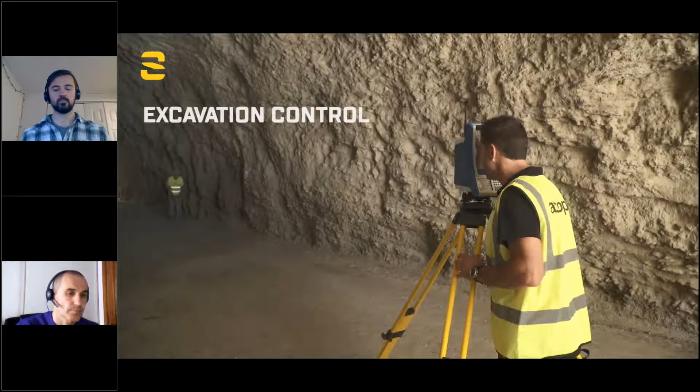One of the scenes in that video was very telling to me, because I worked quite closely with Aplitop and our development engineers out of Germany on what's called the software development kit that allows their software to talk to my robot. And they are actually doing the surface scan feature, which is part of that video. They're doing that better than I do it myself. They found a technique within that SDK that allows them to do surface scan at probably 2 or 3 times the speed that my Survey Pro does that at.

It's not an important feature of Survey Pro, but it is very important to the Aplitop solution, and they've maximized the efficiency there.

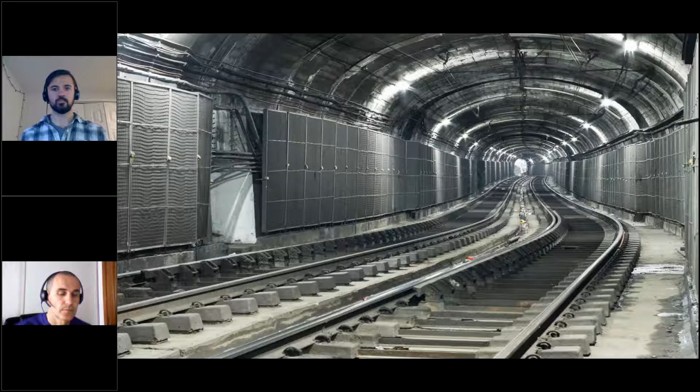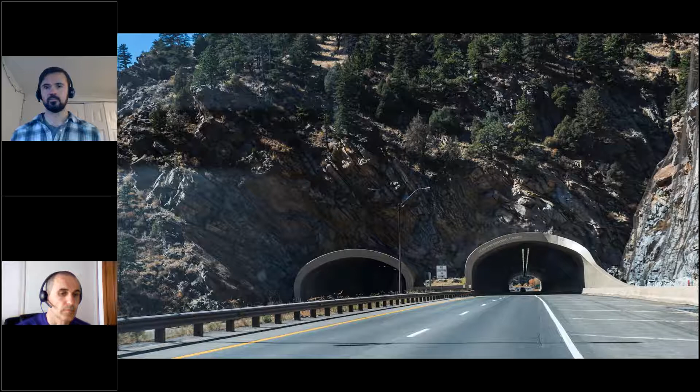So tunnels look different, but they're all the same. They come in a lot of different shapes and sizes, but they're holes - tubes in the ground. They are alignment and template based, station and offset. They use a few words we're not used to using: overbreak, underbreak. But for the most part, the syntax is the same, and the workflow is the same as a land surveyor is doing today. It's just in a very specialized environment that's tubular and linear.

Tunnels are everywhere, and they're constantly being built and maintained, and it's a large business opportunity for land surveyors. There's even books written about tunnels, right? So tunnels are everywhere. They're part of our life.

So what are some of the challenges and the solutions waiting for tunnelers? I'll let Riley speak to this. Riley? Is on mute, Riley, of course. There, all right, sorry about that, thank you everyone.

So how I look at the challenges is there are really 3 categories when we're talking about tunnel surveying. The first one, one of the bigger ones, is construction downtime. Anyone who's worked in a tunnel or on the survey or construction side knows it's a pretty go-go process. There's not a lot of time to lose, because each minute, each hour that the equipment's not working, whether it's the TBM or the road header, whatever it might be, that's a lot of money being wasted. So it's really important for the survey crews to keep up with that equipment and be productive while they're in the field. That's why productivity with any technology, whether it's the total station or the field software, is very important.

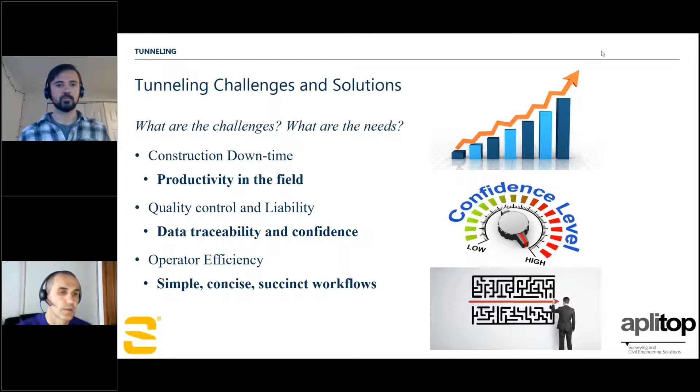Thank you very much, Riley. Well said, well spoken, thank you. Somehow my down arrow is not working on my computer, I don't know why.

So what does it take to build a tunnel? It takes an office component and a field component. In the office, we're designing the tunnel, or quality checking or reporting about it afterwards - so there's both a pre-field and a post-field component. If we look on the right-hand side, the robotic Focus 35 robotic total station is integral to this solution. As far as the data collection platform, we're recommending either the ST10 or the Ranger 7, with a preference for the ST10 - it just seems to work better. There's not a lot of typing in tunnel surveys, so you don't really need the keyboard that the Ranger 7 offers. Notice also that there is an AutoCAD component in the design portion of this. Soon that will be a standalone portion not requiring AutoCAD, but today that is one of the requirements.

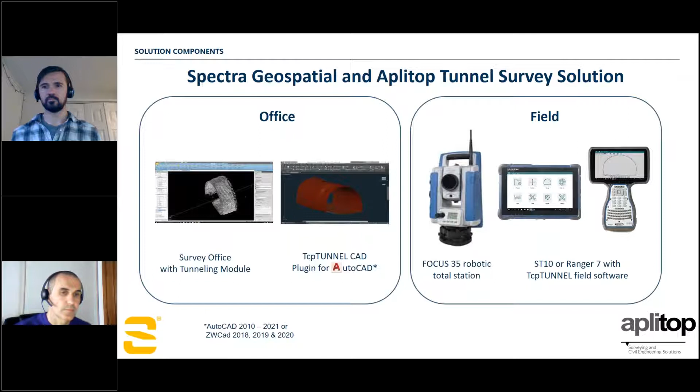So the pre-field part is where we create and design our alignments. It's not really a point-based workflow, it's an alignment and template-based workflow. Basically we're trying to do our stakeout for the blast and drilling so that we can shape our tunnel. Once we've done the drill and blasting, we need to get the as-built, and that's where automated data collection comes in, where we can do surface scans and see how close we are to that design, and what our overbreak and underbreak quantities are.

We can do the quality control checking right here once we've built the tunnel or laid it out and done the blasting, so we can know how close we are to that design. That's the end game: how close can we get to the design, and what are the deltas between what we built and what we designed.

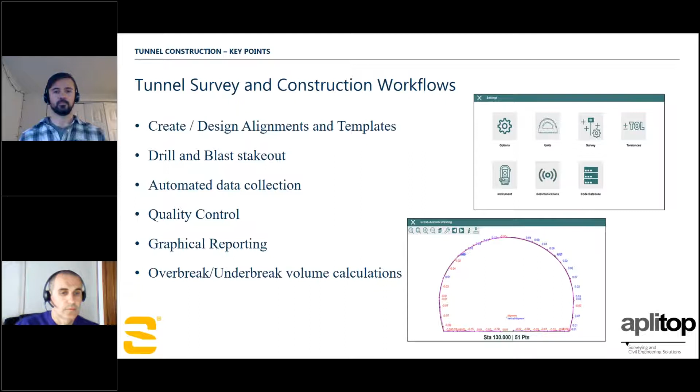Looking at it in a more broken out way, we start in the office, we have projects - that's the actual tunnel project, or tunnels. Many of these are multiple tunnel definitions. Then we create and design the templates and the cross sections, and assign the cross sections along the alignment. Then we take the total station out there and stake it out, laying out those points.

We put in the points where they're going to do the drill and blasting. Once they've done that, we do the surface scan to make sure it's done right, and take all that information back into the office where we can do our reporting. That's the main thing - as Riley said earlier, the accountability and liability is a big part of tunneling that may not be so important in land surveying on the surface, but becomes very important when you start going underground.

Tunnels can be defined in a few different ways - these are two examples where it usually has a radius point that defines how the roof and sides are going to be defined, whether it's a full radius as you see on the left, or whether it has a left and right sidewall that are vertical before you go into the radius or arc component. Sometimes the ground is flat, sometimes it has a side slope, just like we do in roads. You can see we have super elevation possibilities, straight from our roading catalog that we're familiar with today. Nothing there is surprising, except maybe the way the files are named.

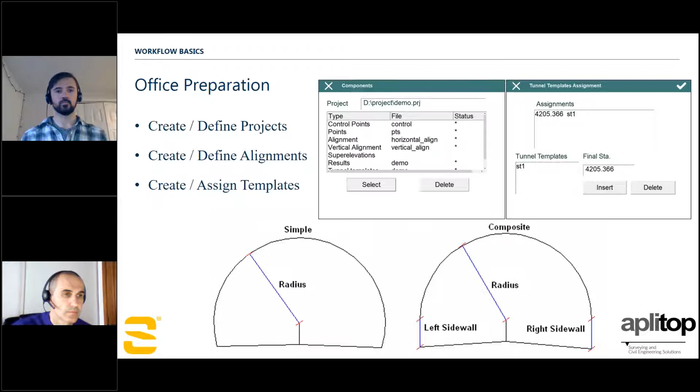Once we've done that design and assigned the cross sections to our alignments, it's time to go out to the field and do our layout, our survey. We do the cross sections to find where the bolts go, where the surface points are, the front cross sections. We go out there, and as you can see in the screen captures provided, these are nice big icons that are fully clickable with gloves on.

As Hugo indicated, this is a very simple program to interface with, and it's not hard to negotiate. If you don't find it on the first button click, you're going to find it on the second button click - it's that close to the surface with all of the routines and features of the program.

I talked with Hugo prior to this presentation, and he's wide open to anybody on this call that wants to test drive the software. Work with Hugo and he'll let you have a copy, probably a timed copy, where you can interface with the software. If you have a Focus 35, even better, but without the Focus 35, you can still get the look and feel of the software quite well.

So we've done our field work, and we come back to the office. These are just a few examples of the office deliverables where we can do 3D modeling, volume calculations, visualization, and generate reports. We can compare the as-built to the design and get our calculations about the volumes involved in overbreaks or underbreaks.

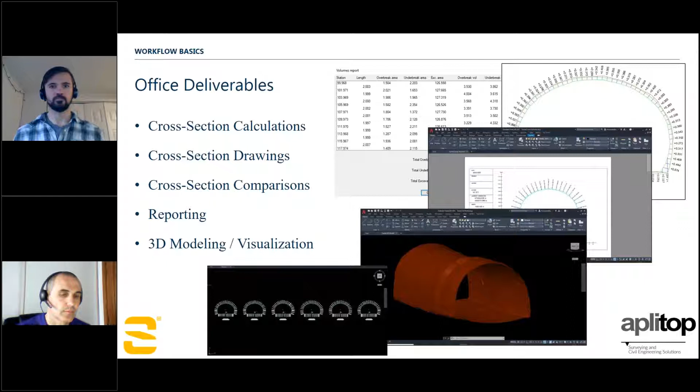So this is just an example of some of the deliverables. There are obviously a lot more that can be provided, but in the context of a webinar we're not going to go through the weeds on that. With that, I'd like to turn the presentation over to David Vargas, who's going to run through a practical presentation of the software and show a real demonstration of the workflow involved in TcpTunnel CAD.

Thank you. I'm going to do the presentation of TcpTunnel and TcpTunnel CAD, following the workflow we've seen in the previous slides. I'll start by creating the project in TcpTunnel CAD, then do a survey with TcpTunnel, and then go back to TcpTunnel CAD to draw the cross sections and create the 3D model of the tunnel.

The first thing we have to do is create a folder and copy inside the files of the project. In this case, we have a LandXML file with the horizontal and vertical alignment definition, and also a DWG file with the tunnel template.

So we go to AutoCAD, and this is the TcpTunnel menu. You have the option to create the project, to create the tunnel templates, to do the cross-section calculations, to do the reports, and also different options such as 3D model, compare cross-section, etc.

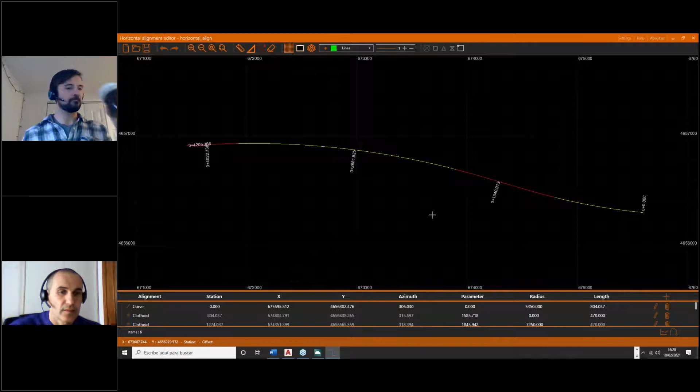Then we are going to import the horizontal and vertical alignment. We go to the horizontal alignment editor and select our LandXML file. We enter the name for this alignment, and this is the horizontal alignment of the project. Then we do the same for vertical alignment - open the vertical alignment editor, go to the same folder and select the same file, and here we have the vertical alignment of the project.

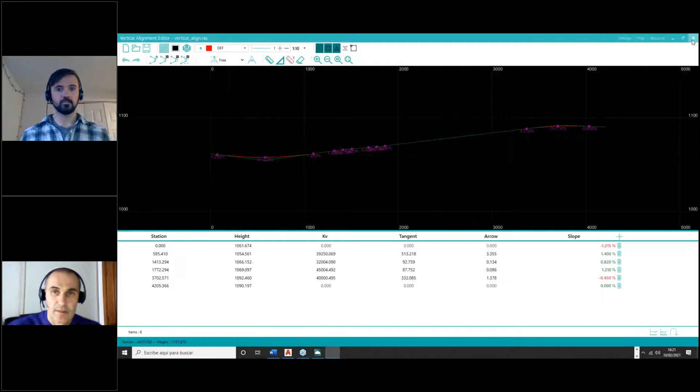Then we have the vertical and horizontal alignment. We select the tunnel template file, and also the control point to do the resection in TcpTunnel in the field. Then we press OK, and we have created the project.

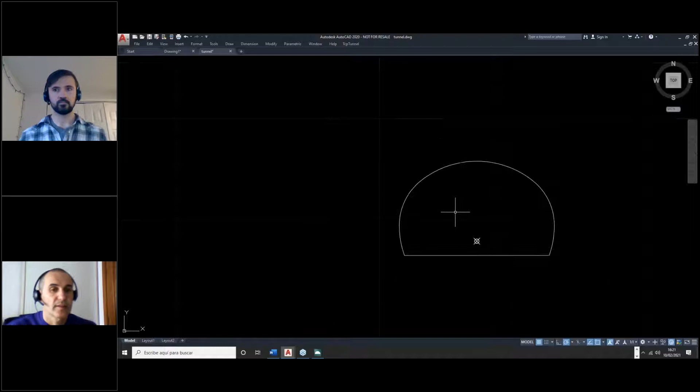Now we are going to open the drawing with the tunnel template - in this case we have only one. Then we go to TcpTunnel, edit tunnel templates. We click on new and select the polyline that defines the tunnel template, enter the name, and select the horizontal and vertical alignment point. Then we click OK, and we have the tunnel template created.

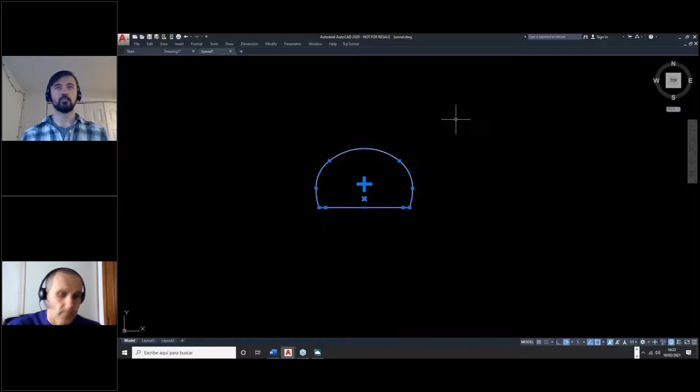Then the next step is to go to tunnel template assignment, where you have the tunnel template we have created in the project. In this case we have only one, and we have to enter the final station we want to use with this tunnel template, using it for all the horizontal alignment. After doing that, we can draw the tunnel.

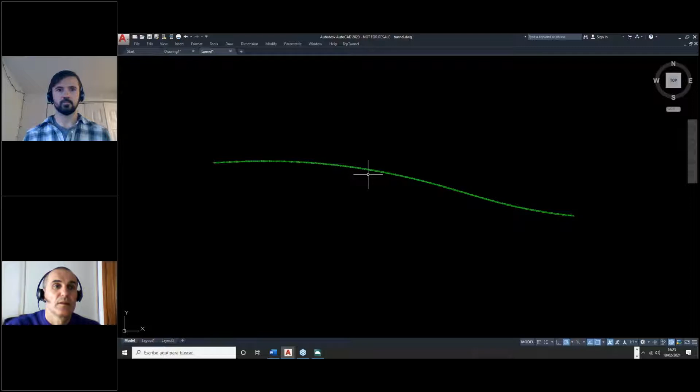Joe asks: if the tunnel changes its shape, would you need a new template, and some type of assignment? David confirms yes, you can add different tunnel templates and go to TcpTunnel tunnel template assignment to set up which template to use along the horizontal alignment. Joe clarifies the tunnel being built now has the same shape throughout since only one template is assigned. David confirms this.

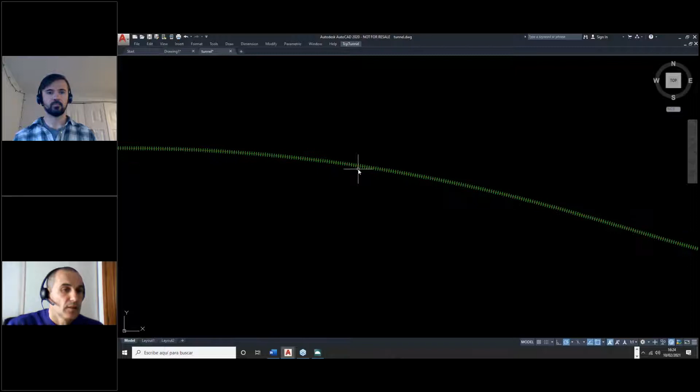So here we have the tunnel, the theoretical tunnel in 3D that you can view in orbit - this is the theoretical tunnel. After creating the project, we can go to the TcpTunnel program and select the project we've created in TcpTunnel CAD.

Here you can see the components of the project we have created. The first thing we have to do is create an empty point file to store the points we measure in the survey.

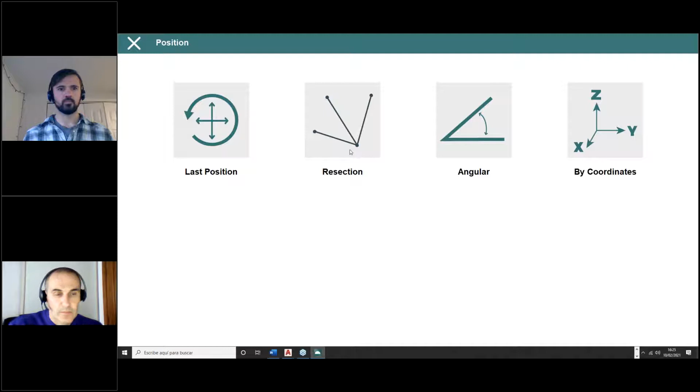The next step is to go to positioning options. In this case, we are going to do a resection. We enter the name of the standing station, or select it from the file.

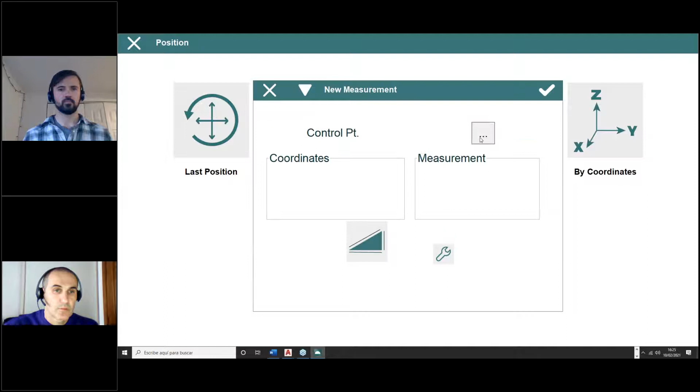Then we measure the different control points. We measure the first one, then the second one, and we do the same for the third.

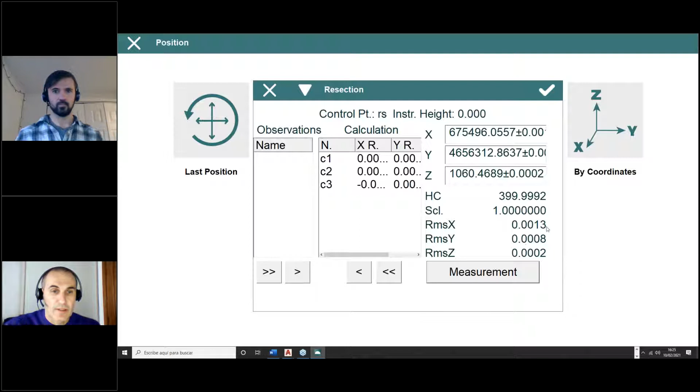After doing this, we have the coordinates of the standing station calculated, and here the errors calculated. Then we can go to different options: survey, stake out, or check.

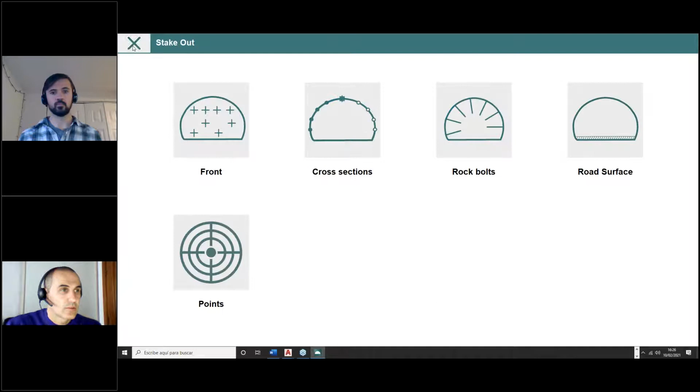We are going to survey some cross sections. The first thing we have to do here is define the theoretical points we want to measure. We have different methods: by length, angle, or height.

We set up the interval, and we can also set up different filters. In this case, we use the method length, with a 1 meter interval, and this is the result of the points we want to measure.

After that, we have to enter the initial and final station and the interval. In this case, for the demo, we are going to measure 2 cross sections.

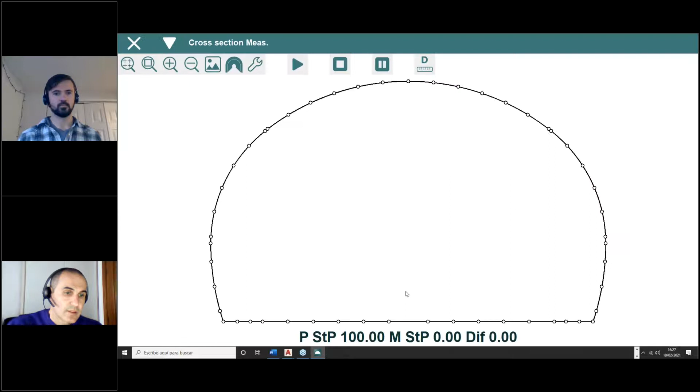Then we can start the cross-section survey. Below you can see the theoretical station, the measured station, and the difference between the theoretical points and measured points.

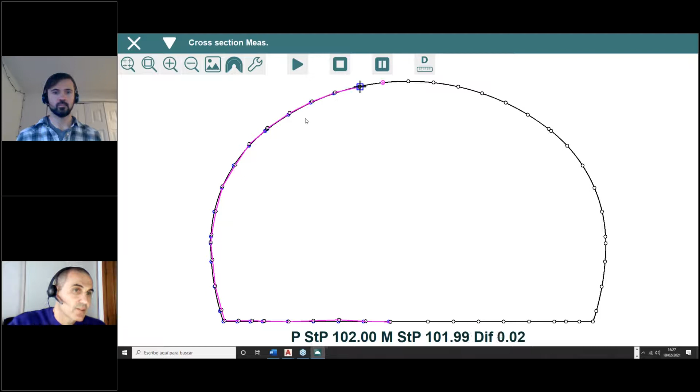Here the total station tries to find every point in the theoretical station. After finishing the surveying, you can see here the difference between the theoretical point and measured point.

Question, David. So just so everyone's aware and for clarification, the total station used its position from the resection and then automatically measured those profiles, the cross-section profiles, yeah. Yes, yes. Awesome.

After doing that, we can go to check, for example, and calculate in TcpTunnel in the field the areas: the overcut, overbreak, and underbreak areas.

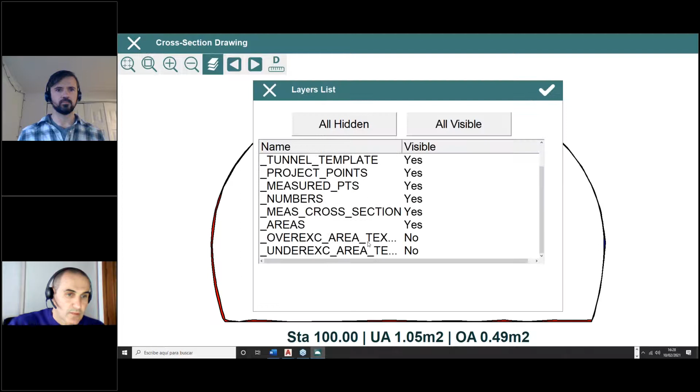So we analyze the points, we enter the interval, the tolerance we set up, and here we can see and calculate in the field the areas, overbreak and underbreak areas.

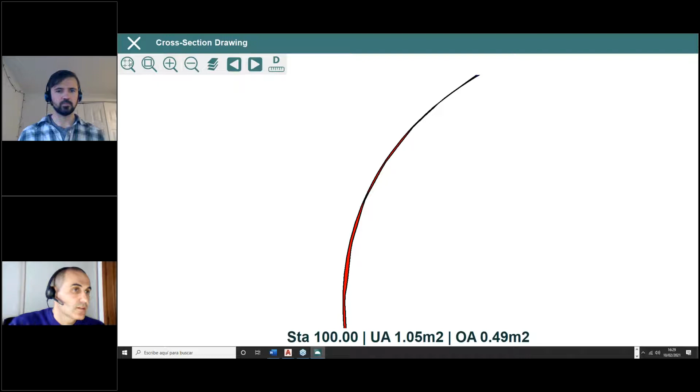That's very useful, and we can do it in the field. We don't need to go to the office to do that. After doing the survey, we can go to the office and process the data.

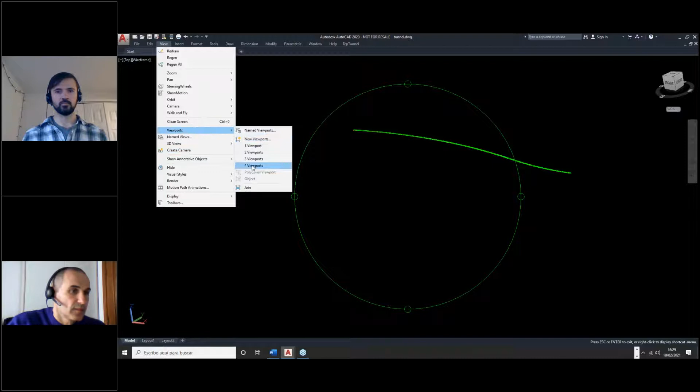We go back to TcpTunnel. Here the only thing we have to do is select or import the points we have surveyed in the field. We edit the project. In this case, we are using the same project, but we select the point file we have created in the field.

The next step is to calculate cross sections. We enter the initial and final station and the same parameters we used in the field, and then enter the name for a cross-section file.

After creating the cross-section file, we can run all the items in the menu of the TcpTunnel tab. So we can go to draw cross-sections.

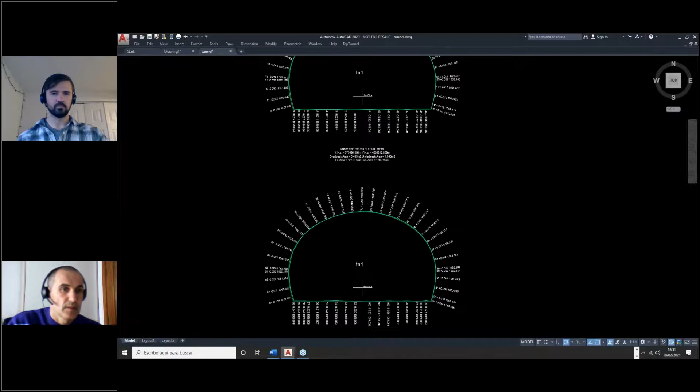Here you can see the cross-sections we have surveyed in the field. For each point, you can see the name of the point, the number of the point, the difference between the theoretical and measured cross-sections, and the height of the points.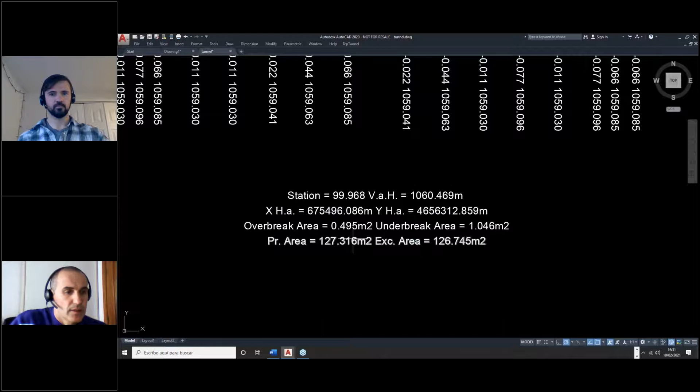Below, for each cross-section, you can see the station, the horizontal X and Y coordinates, the vertical alignment height, and overbreak and underbreak areas.

Now I'm going to change the cross-section file to do more of a volume report. So I'm going to edit the project and select a cross-section file we have here with more information. After doing that, we can edit cross-sections.

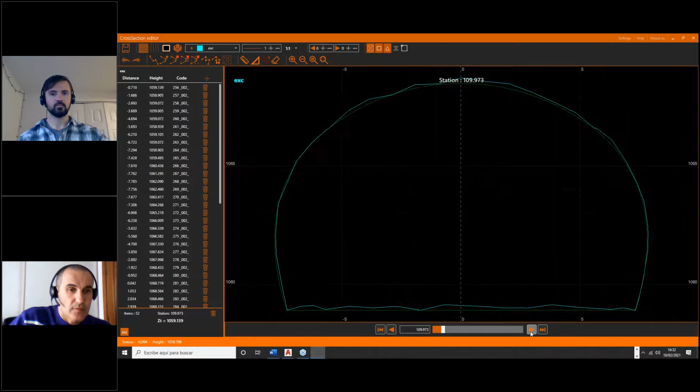Here you can see the cross-sections we are measuring in the field. You can edit and modify the cross-sections, and you can create different reports, like volume reports.

Here you have the station, the length, the overbreak and underbreak areas and volumes. You can print the reports in different formats, like physical printer, ASCII file, web file, or Microsoft Word or Excel.

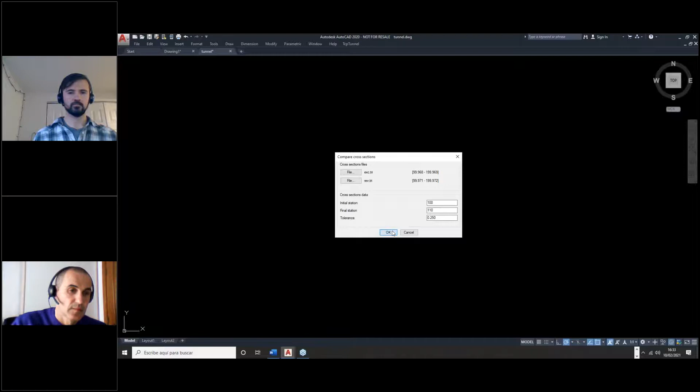Also, you can compare different cross-sections measured on different days. For example, we are going to compare the excavation and concrete cross-sections. Here you have the volume report, and you can also draw.

David, while that's calculating, there's a few questions that came in. One question was what design formats can we import and use with TopTunnel CAD? For instance, can I import an IFC file and use that with TopTunnel CAD?

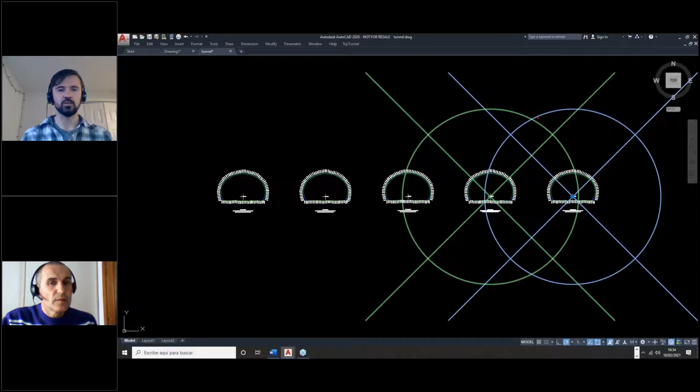Can you repeat? I don't understand the question, Ray. Yeah, so if I already have a design file, can I import that design file into TopTunnel CAD and use it for creating reports? For example, LandXML or IFC? You mean the theoretical tunnel template?

Yes. No, now in TopTunnel CAD you have to create the tunnel template from the drawing. Can you import alignments though, right? Yes, you can import alignment from a LandXML file, but the tunnel template you need to do from the drawing, or also like a TXL file.

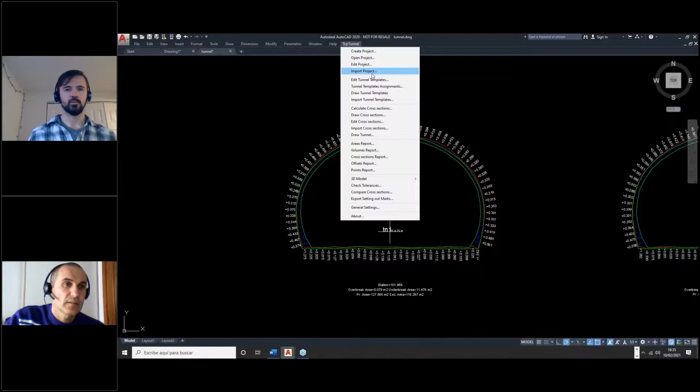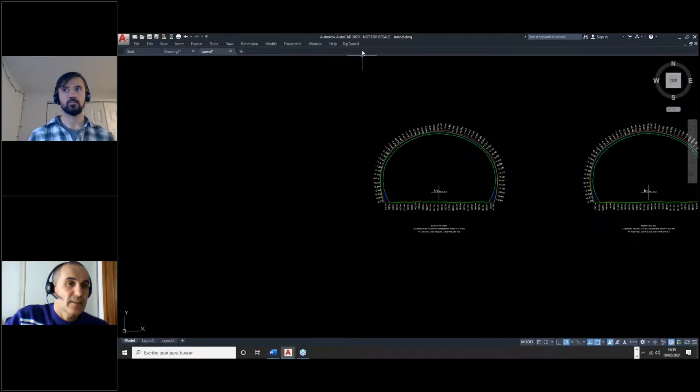Here, this is the option to compare cross-sections. And here you can see the concrete cross-section, the excavation, and also the theoretical tunnel template. And here you can see the difference between them.

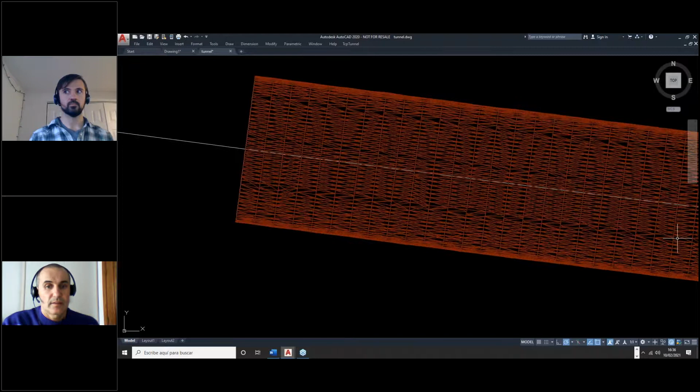And also, to finish the demonstration, I'm going to create the 3D model of the tunnel. So I'm going to go to 3D model draw, enter the initial and final station and the number of points you want to use to create the model. And here is the 3D model of the tunnel.

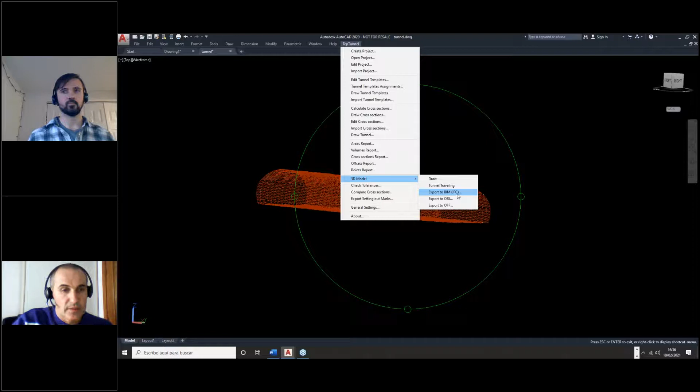You can see a 3D orbit. And also after creating the 3D model, we can do a route inside the tunnel, or even export to different formats like IFC, OBJ, or OFF. So in this case, we are going to export to BIM.

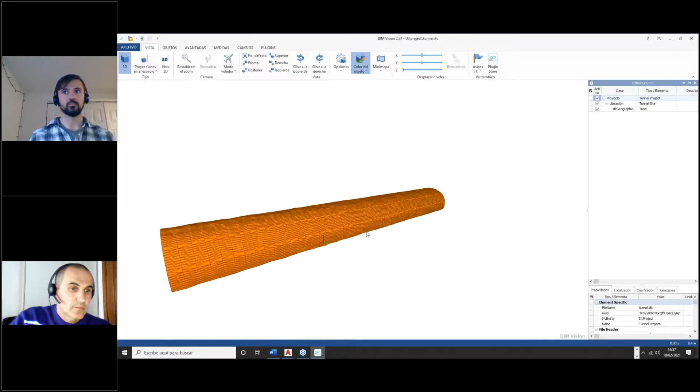And if we go to the project folder, we can open the IFC file with BIM Vision, for example, and here you can see the 3D model.

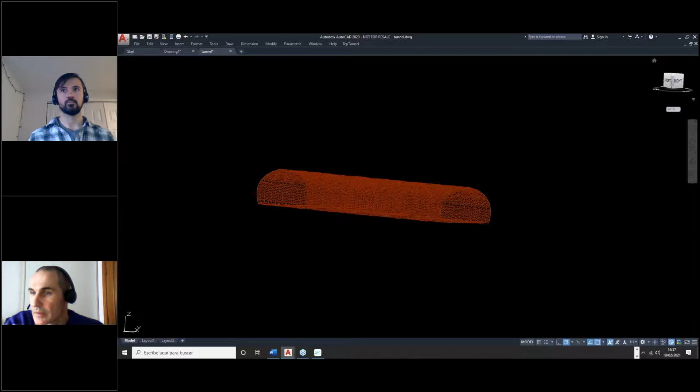So Riley, will you give me back the screen? Yes. You should be getting it pretty soon. Yep, perfect. We can see the presentation. Great, welcome back.

We're showing that field work being accomplished with the Focus 35 and the Spectra ST10 data collector running the TopTunnel software on it. That is the Spectra part of this equation. And the office part and the software part is the Aplitop piece of this equation. So it's a true partnership here.